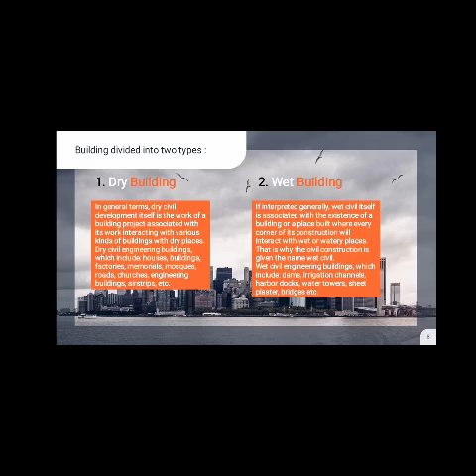The second one is wet buildings. If interpreted generally, wet civil itself is associated with the existence of a building or place built where every corner of its construction will interact with wet or watery places. That is why the civil construction is given the name wet civil. Wet civil engineering buildings include dams, irrigation channels, harbor docks, water towers, sheet plaster, bridges, etc.

Types of buildings: Educational buildings. These are buildings housing educational institutions such as schools or colleges, which are affiliated and recognized by an appropriate board, university, or any similar evaluation authority.

The building should promote the aggregation of instructional, educational, and recreational activities pertaining to educational purposes. Further, it is mandatory for the buildings to have proper residential facilities for essential staff who need to reside within the campus. Apart from this, the institution...

Residential buildings. These are buildings which are used for normal residential purposes and should facilitate activities such as sleeping, living, and cooking. The buildings must include one or more family residence, apartments, flats, and private garage.

Institutional buildings. These types of buildings consist of buildings that are constructed by the government, semi-government, organizations, or registered trusts for specific purposes. Those specific purposes include medical treatment purposes, such as treatment of physical or mental illness, children's hospitals, etc.

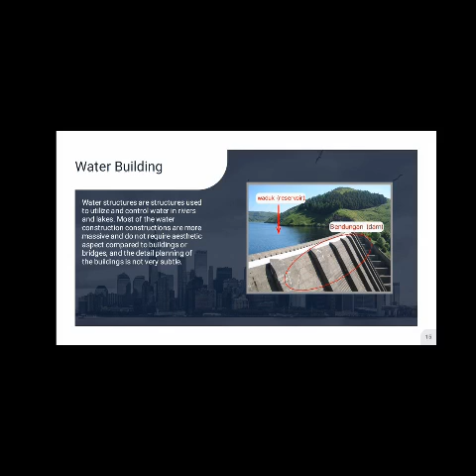Third, building material. This section is about the materials needed to build a building. Materials are divided into two types: natural and man-made.

Natural material is any product or physical matter that comes from plant, animal, or ground. Minerals and metals that can be extracted from them without further modification are also considered to belong in this category.

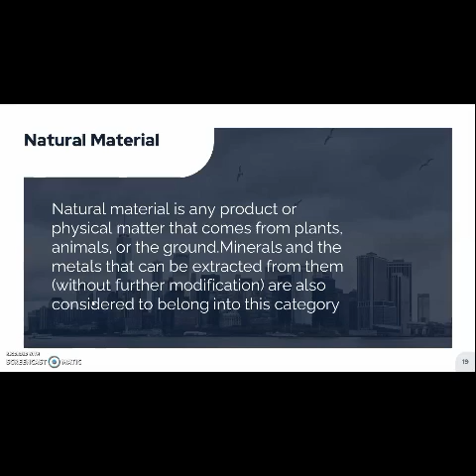Mud is soil, silt or clay mixed with water. It usually forms after rainfall or near a water source. Mud as a construction material has been extensively used since Neolithic times.

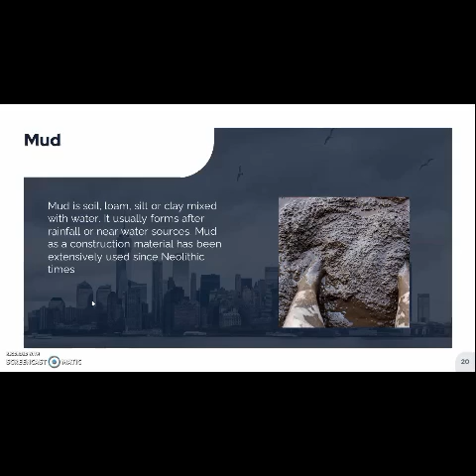Stone. There are huge variations within each of these rock types caused by specific mineralogy and geologic conditions, and while any stone can be used for building, they each have constraints that make them more or less suitable for different purposes.

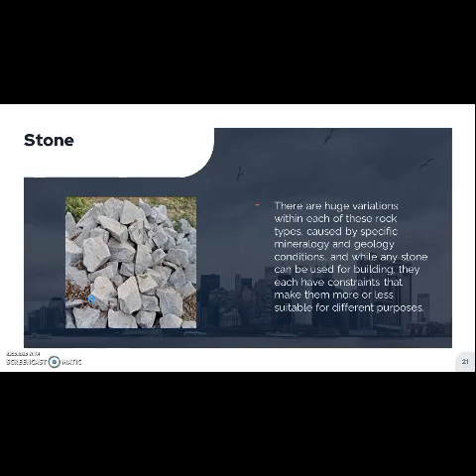Sand is a granular material composed of finely divided rock and mineral particles. It is defined by size, being finer than gravel and coarser than silt. The composition of sand varies depending on the local rock source and condition.

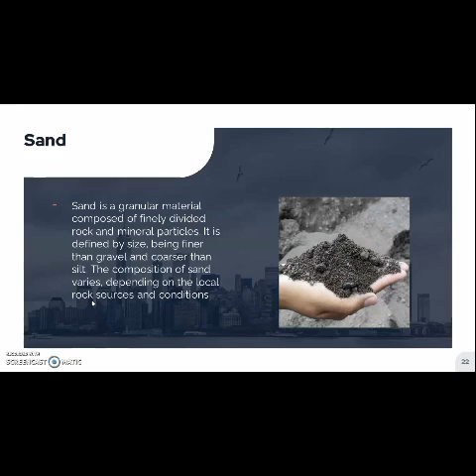Wood is a versatile raw material and the only renewable building material. Its properties are very suitable to use. It is possible to build a comfortable house using only wooden products, and wood can also be used to build structures.

Leaf. The leaves that are widely used are palm leaves, which are usually used for roofs, especially in tropical areas.

Lime is a calcium-containing inorganic mineral composed primarily of oxide and hydroxide, usually calcium oxide and/or calcium hydroxide. Lime is used in cement, concrete mixtures, etc.

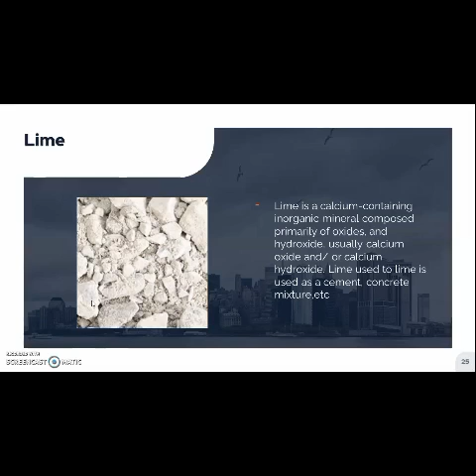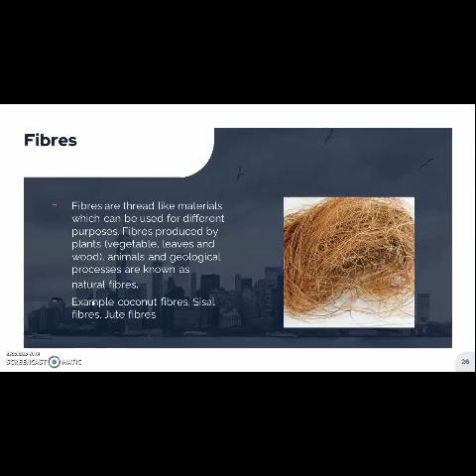Fibers are thread-like materials which can be used for different purposes. Fibers produced by plants, vegetables, leaves, wood, animals, and geological processes are known as natural fibers. Examples: coconut fibers, sisal fibers, jute fibers.

Man-made materials are human-made. These are resources that are manufactured by humans and are not naturally occurring.

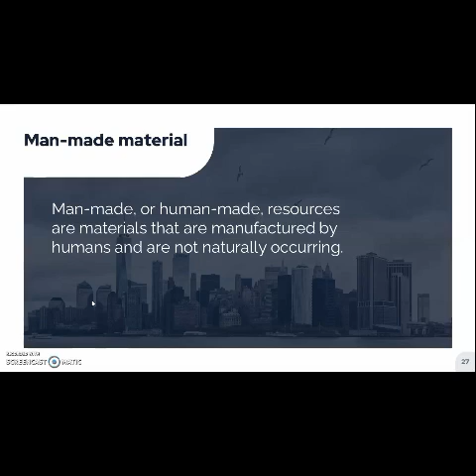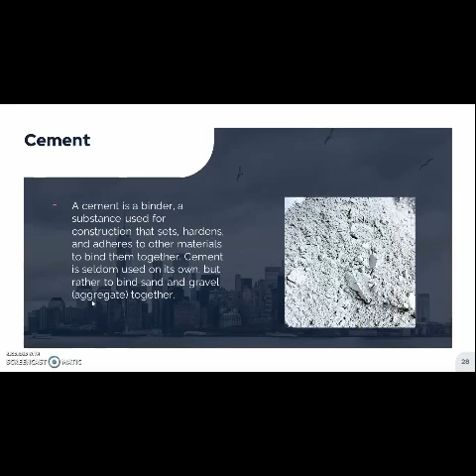Example: cement is a binder, a substance used for construction that sets, hardens, and attaches to other material to bind them together. Cement is seldom used on its own, but rather to bind sand and gravel aggregate together.

Brick is a type of block used to build walls, pavements, and other elements in masonry construction. Properly, the term brick denotes a block composed of dried clay, but is now also used informally to denote other chemically cured construction blocks.

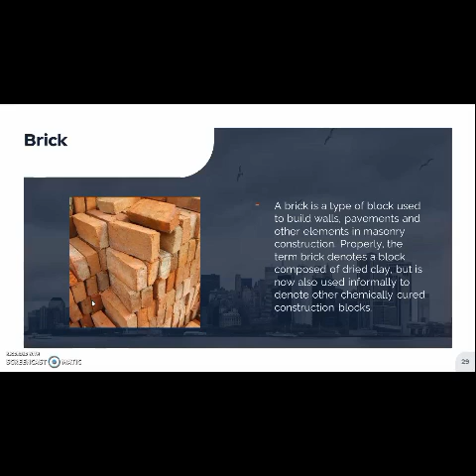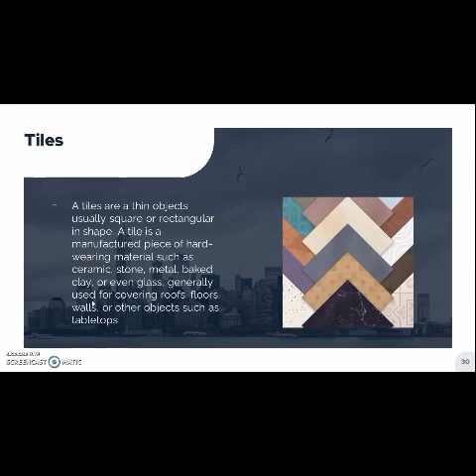Tiles are thin objects usually square or rectangular in shape. A tile is a manufactured piece of hard-wearing material such as ceramic, stone, metal, baked clay, or even glass, generally used for covering roofs, floors, walls, or other objects such as tabletops.

Glass is an amorphous, non-crystalline solid which is often transparent and has widespread practical, technological, and decorative use in things like window panels, tableware, and optoelectronics.

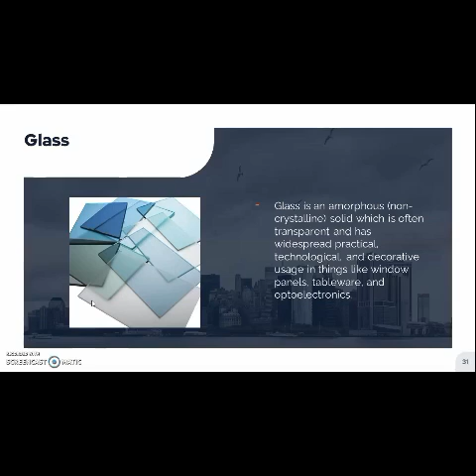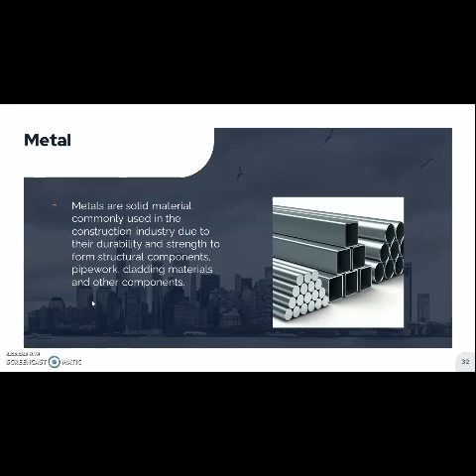Metal. Metals are solid materials commonly used in the construction industry due to their durability and strength, used to form structural components, piping, cladding materials, and other components.

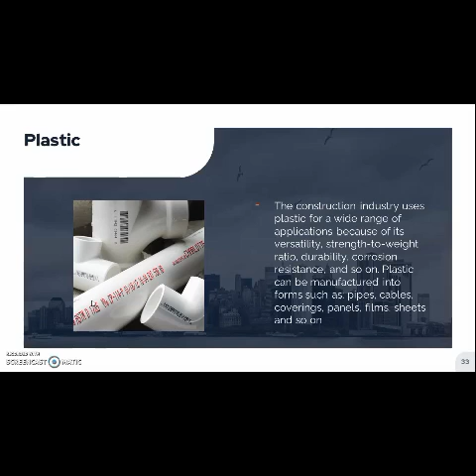Plastic. The construction industry uses plastic for a wide range of applications because of its versatility, strength-to-weight ratio, durability, corrosion resistance, and so on. Plastic can be manufactured into forms such as pipes, cable coverings, panels, film, sheets, and so on.

Now you know about the materials needed for a building, and we move on to the next section about tools. Fourth, building tools. This section is about the tools needed to build a building.

Building tools are divided into tools and heavy equipment. Tools for building construction have been around for a long time. It's important that the right tools are available for the right job. Without tools, it will be difficult to build a building.

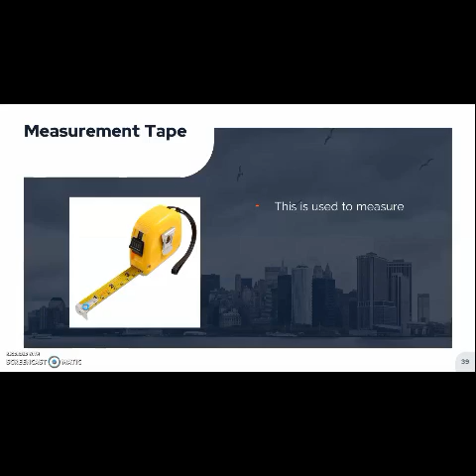Example: hammer. This tool is used to drive and remove nails. Measure tape, this is used to measure. Masonry trowel, this tool is used to place cement mortar.

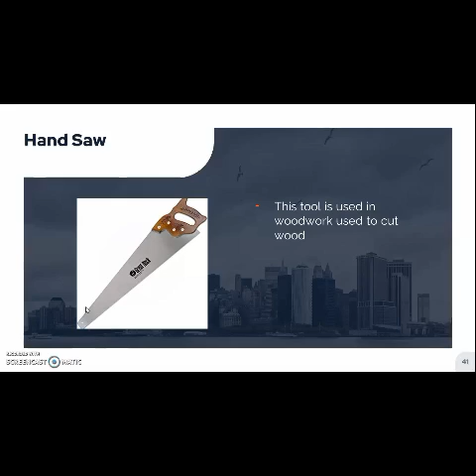Handsaw. This tool is used in woodwork to cut wood. Hoe. This tool is used to dig and to place concrete cement mortar in a head pan.

Heavy equipment or heavy machinery refers to heavy-duty vehicles specially designed for executing construction tasks, more frequently ones involving earthwork operations or other large construction tasks.

Example: excavator. An excavator is a machine that can excavate soil of various types, and is also forcefully used for loading and dumping.

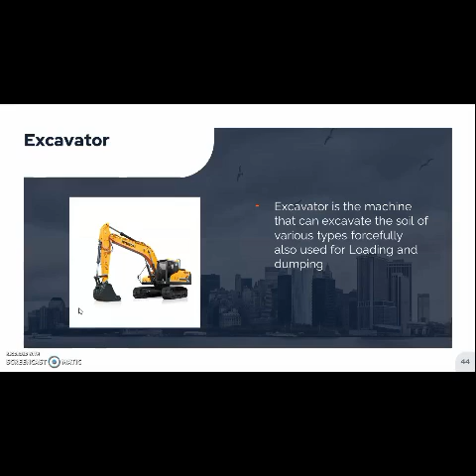Loader. A loader is used in construction to move or load material such as soil, rock, sand, demolition debris, or etc. into or onto another type of machinery.

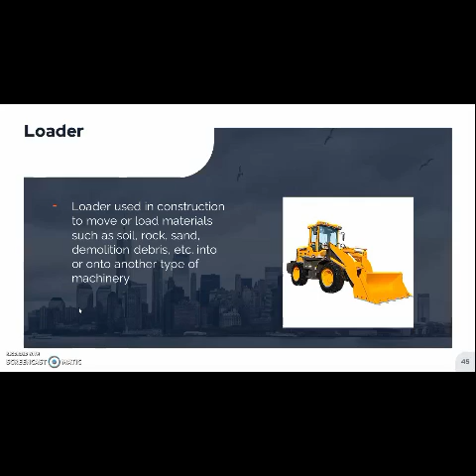Dump truck. A dump truck is used for hauling materials such as sand, gravel, or demolition waste for construction, as well as coal.

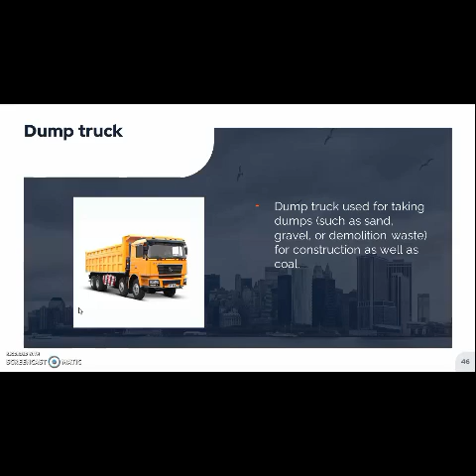Compactor. In construction, a compactor is used for compacting crushed rock as the base layer underneath a concrete or stone foundation or slabs.

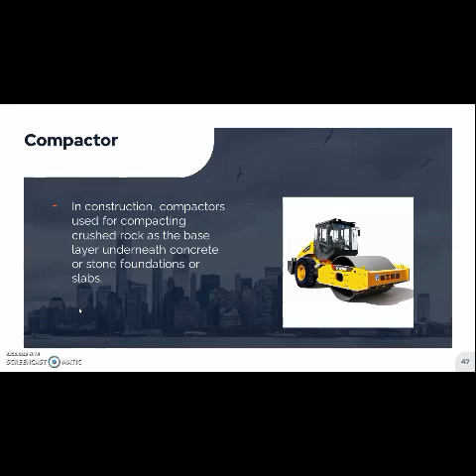Crane tower. Generally equipped with a hoist rope, wire rope, or chain that can be used both to lift and lower material and to move it horizontally. It is mainly used for lifting heavy things and transporting them to other places.

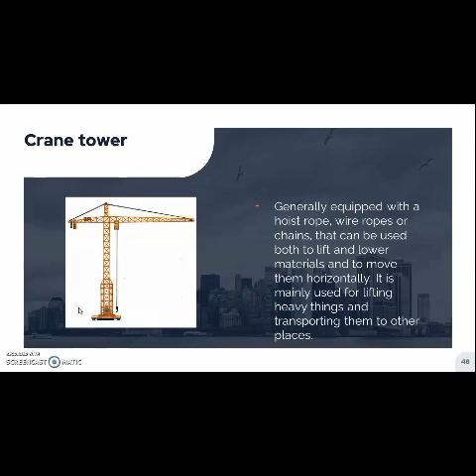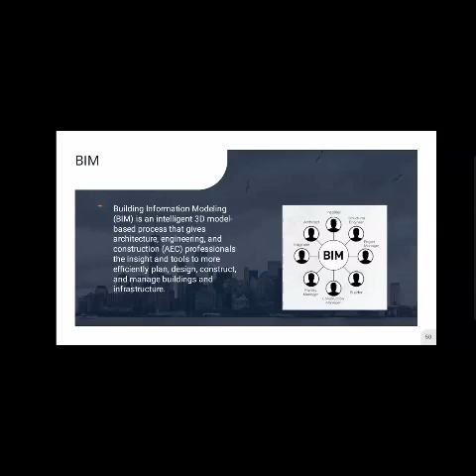Fifth, innovation. Building information modeling is an intelligent 3D model-based process that gives architecture, engineering, and construction professionals the insight and tools to more efficiently plan, design, construct, and manage buildings and infrastructure.

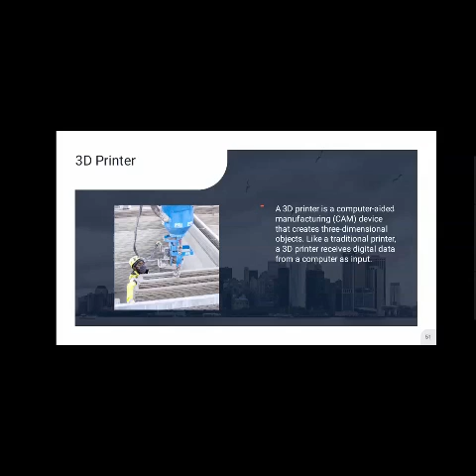A 3D printer is a computer-aided manufacturing device that creates three-dimensional objects. Like a traditional printer, a 3D printer receives digital data from a computer as input.

Eco-materials are defined as those materials that enhance environmental improvement through the whole life cycle while maintaining acceptable performance. Examples include fly ash and ferrock.

Sixth, construction. A building is a complex thing with many aspects. Knowing what a building is and everything in it, such as the type of building, building materials, and what tools are used in designing and building, is expected to increase insight and knowledge and build interest in civil engineering.